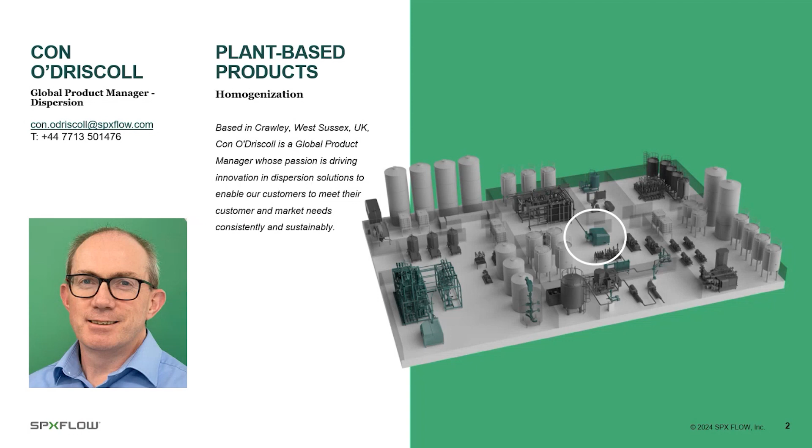Firstly, I'd like to share our purpose statement at SPX Flow, which is to improve the world through innovative and sustainable solutions. We do that through a combination of many factors, firstly through our people and our locations around the world. We truly are located in all parts of the world at SPX Flow. We have our innovation and R&D centers where we can help you develop, and we have great products developed through our engineering teams and manufactured in our factories. So we look forward to showing you how some of our products and solutions can help you with today's challenges.

Here's the agenda that we'll be running through today. Firstly, I'll begin by sharing some of the background and basics for plant-based and homogenization. Then we look at the parameters that influence homogenization effectiveness in plant-based beverage production. Then we'll take a view on some innovations and recently launched products and how we can help you through our innovation centers. And as mentioned, we'll finish with a question and answer session.

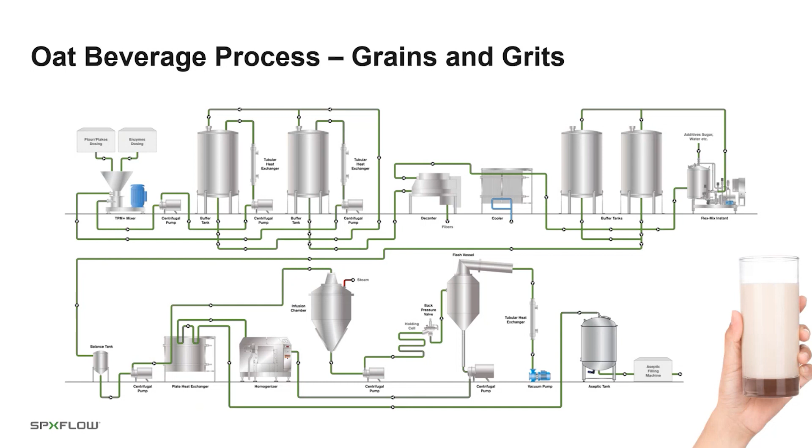So homogenization is an important part of current beverage processing lines. Also to say that at SPX Flow, we have most of the equipment and processes that you see here within our portfolio. But for those that we don't have, we work in partnership with many fine providers, so we can help you to design and complete the processing line, even if we don't have that equipment in our own portfolio. So let's take a look at some of the challenges that are faced in plant-based beverage processing today.

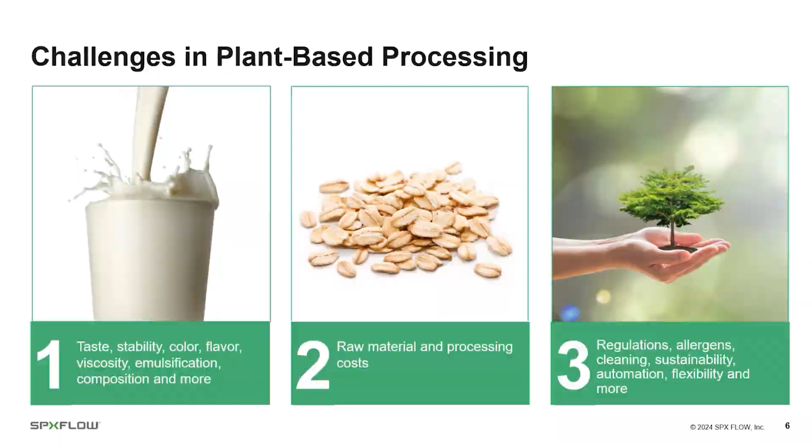We recognize these challenges. We see them in many areas of production, no different in the plant-based environment, and perhaps some additional requirements because of the expectation about segregation of plant-based products compared to some of the traditional products. So now let's start to talk about homogenization and what a homogenizer is.

Many of you will be familiar with what homogenizers are, so I'd like to also remind you of the basic principles. With homogenizers, we talk about the physical part, but also the effect that it has. So we talk about a power end and a liquid end, and that's reflecting what we see here on the right, in terms of a homogenizer basically being a pump with a homogenizing valve arrangement attached.

The pump is a reciprocating pump, typically 3 or 5 plungers on production models, and that's driven via an electric motor and a transmission system, usually comprising of some gears or belts. That pump effectively provides the flow of the liquid into the homogenizing valve assembly itself.

Homogenization has a physical effect on the product. It can be shearing, hydrodynamic cavitation, turbulence, or a combination of those. That physical effect is what causes the characteristics of the product passing through the homogenizer to change. And that's sometimes a misconception, that homogenization is somehow adding or taking away from the product. It's not. It's simply changing the characteristics of the product in a way that's desirable, either for quality, consistency, or shelf life stability. It can be a number of, or a combination of, characteristics that are changed by homogenization.

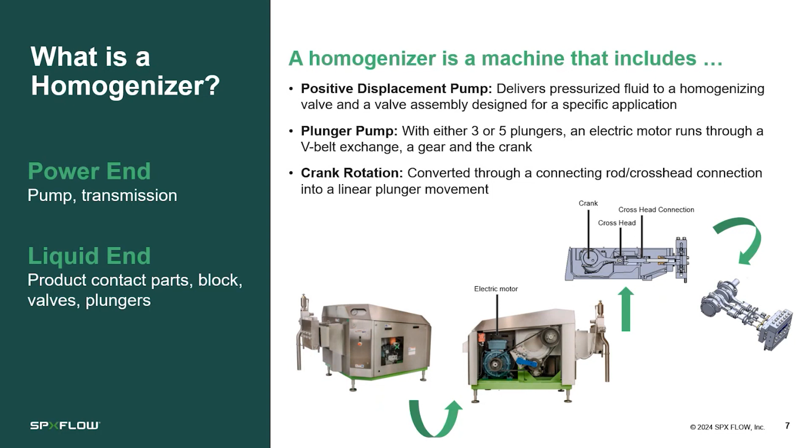So that was the pump that delivers the product to the homogenizing area. Now let's take a look at what happens in the homogenizing valve assembly itself. The product is forced under pressure through a very small gap in the homogenizing valve, and that causes intense mixing and turbulence. That turbulence and mixing releases energy very much locally within the homogenizing valve. And it's that energy that causes the effects of shearing, cavitation, and dispersion that we talked about in the last slide.

So there are various parameters that influence the amount of homogenization that takes place. It can be the geometry of the valve itself, the gap distance, the flow rate, of course, will influence what is happening as well, and also other things such as whether it's 1-stage or 2-stage homogenization, which is 1 or 2 homogenizing valves. So all of these parameters will influence what homogenization does in terms of changing the characteristics of a product.

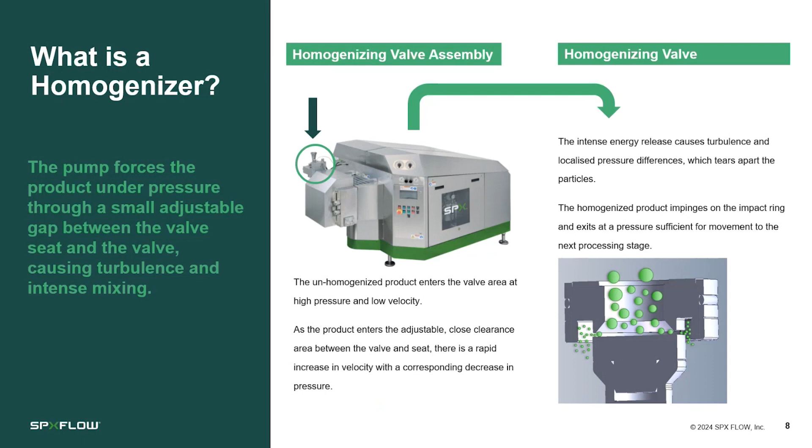Some of the key quality improvements that homogenization gives are improving stability through less sedimentation and separation of product, consistency of viscosity, and it can compensate for some variations in the premix, though good premix mixing itself is always required for homogenization. It improves flavor through changing the characteristics, improves mouthfeel and reduces chalkiness due to particle size reduction and dispersion of the various elements, and improves the bioavailability of nutrients. The more the nutrients are opened up within the body of the liquid, the more their availability increases. The appearance can also be improved, either through color or luminosity, for example on whiteness. Homogenization is known to have those effects.

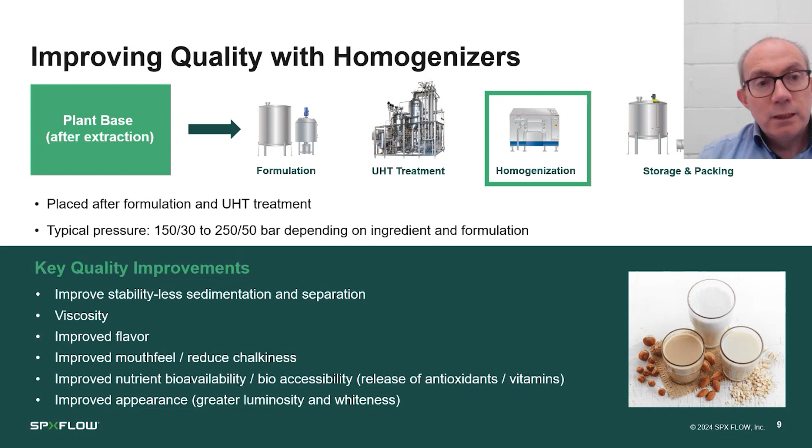So many of these areas are well understood, but with correct selection and application, the homogenizer can be optimized to some or more of these characteristics and quality improvements, depending on what's desired.

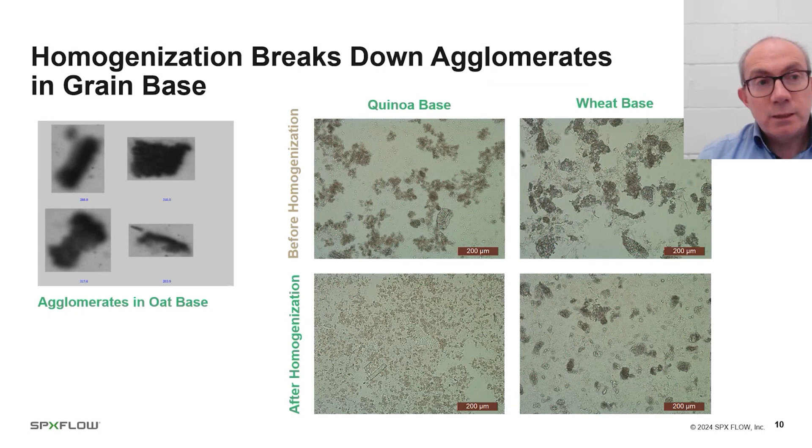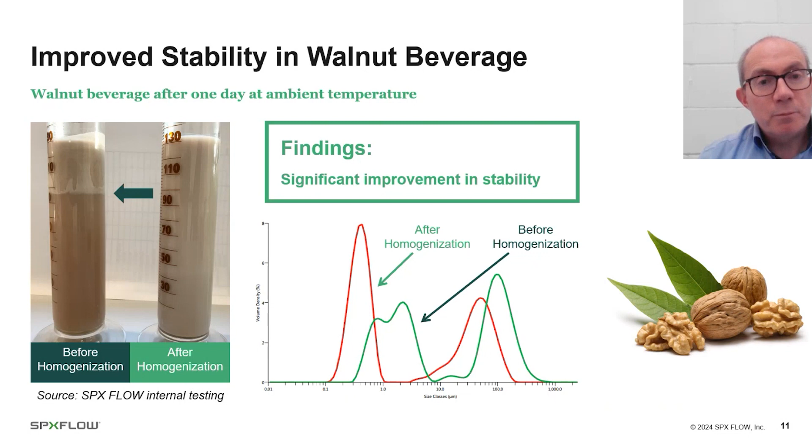So here we see another example showing improved stability through homogenization. In this case, it's a walnut beverage comparing an unhomogenized sample and a homogenized sample after being stored for 1 day at ambient temperature. Before homogenization, the product is less consistent and shows signs of separation, whereas the photograph on the right shows a consistent product with no separation. The graphs are taken from these samples: red is with homogenization, green is without. Again, the stability improvement is seen in the graph in terms of particle size reduction. The two peaks represent the smaller one being the oil elements of the beverage and the larger one being the various solid elements. But all elements of the product benefit from particle size reduction through homogenization.

So here are some of the selection parameters used for correctly applying homogenization to your products. The correct configuration maximizes the benefits, both for the product and to ensure a long operating life for your homogenizer itself. Firstly, we would look at the product details, for example characteristics such as viscosity and the level of solids or abrasives in the product.

And what that can influence with viscosity, it might mean that we need specialized feed systems or oversized suctions or particular types of suction valves, which needs to be carefully considered to ensure that the homogenizer is pumping fully. The best running homogenizer is one that's pumping at full efficiency and without any air or cavitation in the feed system.

Secondly, the solids will influence, for example, the materials that are selected. We use harder materials such as tungsten carbide to give a longer operating life where we have solids and abrasive products.

Of course, then the next category is the flow rate and pressure. That will depend on your desired capacity in the line, and the pressure governs the outcomes of the homogenization. Higher pressures generally lead to lower particle sizes. The homogenizing valve itself we touched on, but the geometry, the materials of construction, the gaps, these are all influencing the outcomes and ensuring that homogenization is effective.

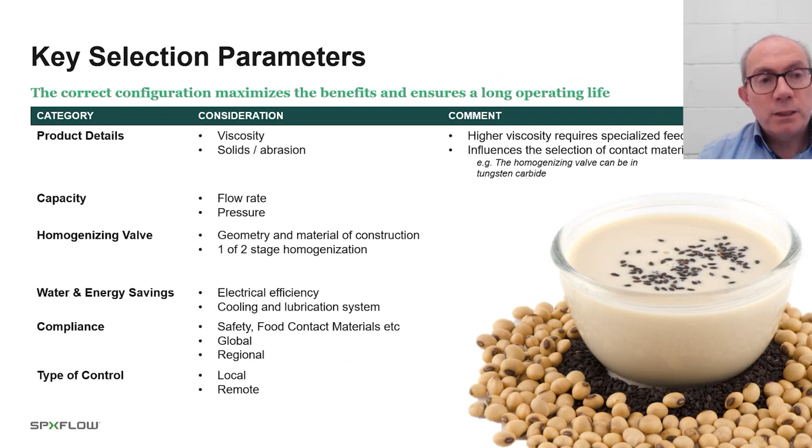And then overlaid with that, getting back more to the pumping side and the engine, if you like, of the homogenizer, certain selections can influence water and energy savings. For example, the electrical efficiency of the motor, whether a frequency converter is fitted to ensure optimum operation, whether you choose to have automation of the utilities and water consumption. Those can influence the overall footprint in terms of utilities.

We also need to think about compliance in terms of safety, in terms of food contact materials, whether on a global or a regional basis. And finally, one of the other characteristics is the type of controls, whether it's locally operated or remote automatic operation, which is more typical on larger process lines nowadays.

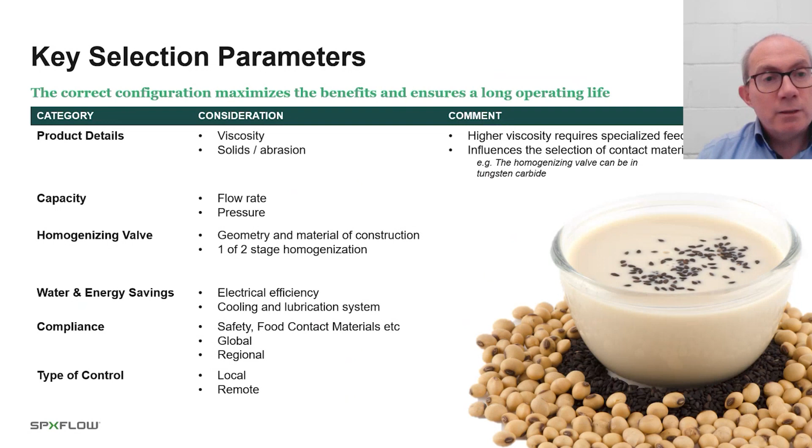So all of these selection parameters help to optimize the selection of homogenizers for plant-based processing lines, not only for the product outcomes, but also for the longevity of the equipment and for the water, energy, and utilities footprint.

So now I'd like to share an example of an innovation that we're very excited about, and we welcome the opportunity to discuss with many of you. And this is around the improvement of a standard beverage production line to reduce the losses in solids and proteins.

Here we're using oat beverage as an example. On the top of the graphic here, we show a typical schematic of a process line with the fiber separation, removing the solids typically through decanters. And that process can heavily influence the losses in solids and protein, up to 30%, as an example for an oat beverage line.

Decanters are very effective in removing large insoluble particles, which must be removed in order to give the desired mouthfeel and stability and customer acceptance. But they're fairly indiscriminate in terms of removing a larger amount of protein, for example, which is bound up in the product.

So the process which we show on the bottom part here is what we call a whole oat beverage production, where we replace the decanter with high pressure homogenization. We still have homogenization post heat treatment, but the earlier homogenizer step is designed to break up and make soluble some of the products and components within the plant-based liquid, which would normally be removed in a traditional process.

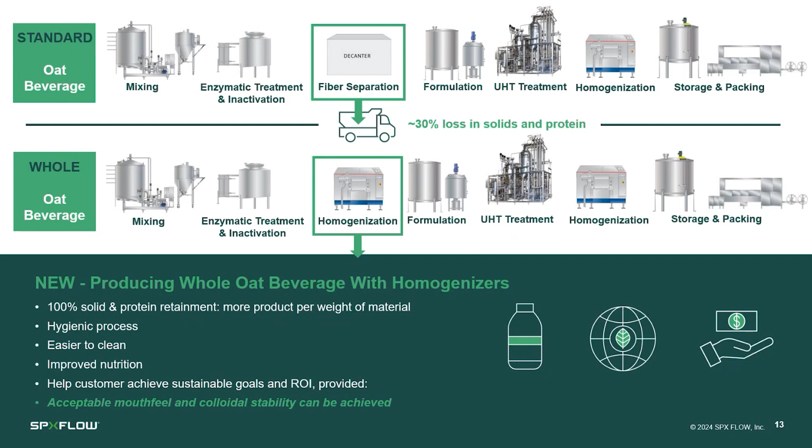Here's an example of some product that's been put through this process. It's an oat-based product where we see on the left a graph showing particle size and pressure. As mentioned before, increasing pressure will reduce the particle size significantly.

You see the photograph in the middle showing the stability of the product. The one on the right has been homogenized and shows a really consistent appearance. Finally, we have the microscopic details from unhomogenized to a number of different homogenized tests, and again the increasing pressure shows a better particle size distribution and increased product stability.

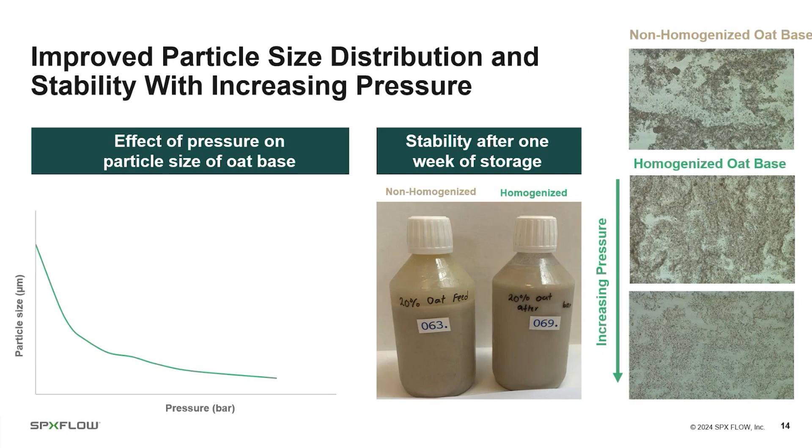So again, we welcome you contacting us to hear more about how this process might be applied and to test your formulations in our innovation centers to develop this great process improvement.

Now we'll look at another innovation related to homogenizers, which may be of interest, and this relates to water consumption. Here we offer the homogenizer water recycling system. It's a compact system which sits next to your homogenizer and recycles up to 97% of the water used for cooling and lubrication of homogenizers.

Many people don't realize how much water homogenizers can use annually because of that cooling and lubrication system. It hasn't been considered for recovery or recycling in many cases until now, because the water has already gone down the drain. So this system keeps the water out of the drain. It sanitizes and filters the water and enables it to be reused on a continuous basis, so that you're effectively in a closed loop in terms of the homogenizer water requirement.

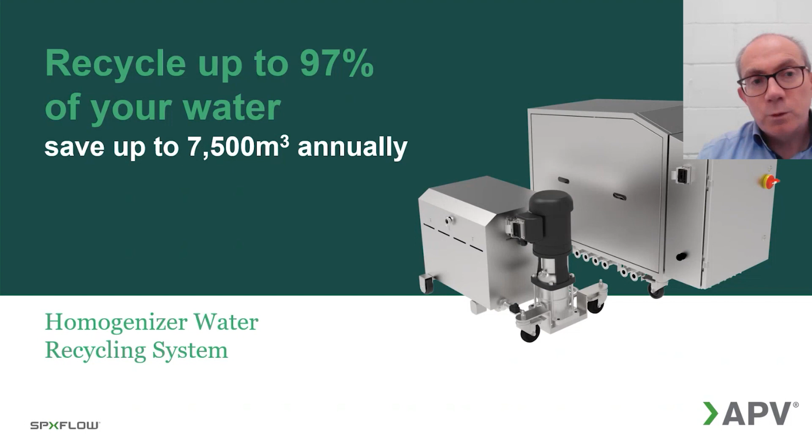The drivers for this technology could be many: initially thinking about conserving water as one of the world's most valuable natural resources, so it may be a sustainability driver. It may simply be due to the cost of water or water consumption goals in place at your plant, in terms of availability of water or supply constraints. Or it may simply be to have a more dry floor policy and avoid water going down the drain, where it can only be used for low-grade purposes if there's any treatment or recovery.

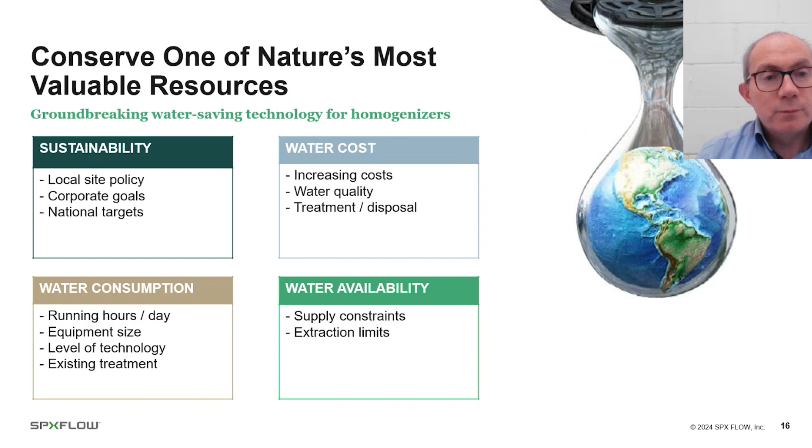So this system allows you to recover up to 97% of that water. It's fully automatic, retrofittable, and plug and play. So once it's installed, it can be running very quickly, and at no stage will it stop the homogenizer from operating. So again, please talk to us about this if it's of interest.

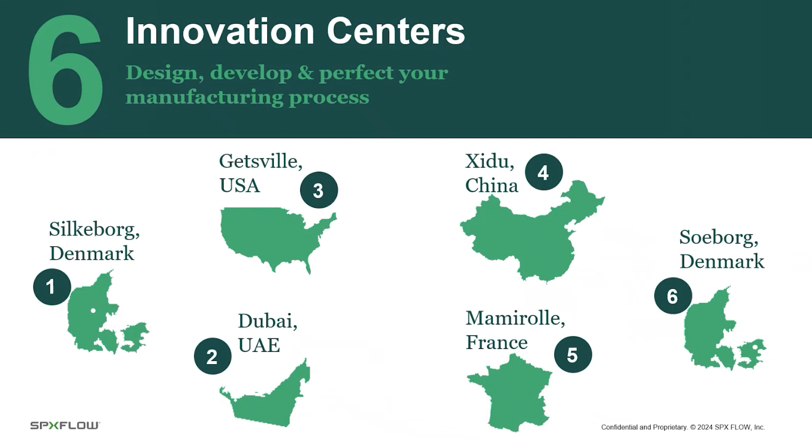Not specific to homogenization, just want to remind you of where we are around the world in terms of our innovation centers. These centers are intended to help you design, develop, or perfect your manufacturing processes and your recipes. We welcome customers to come and develop their recipes with us.

Sometimes we develop for them and then share the results, and sometimes we rent equipment from these centers. Many options are possible. We would be very happy to discuss your needs if you don't have the facilities yourselves to develop product, or you'd just like to take it away to a separate environment where we can help you with our expertise.